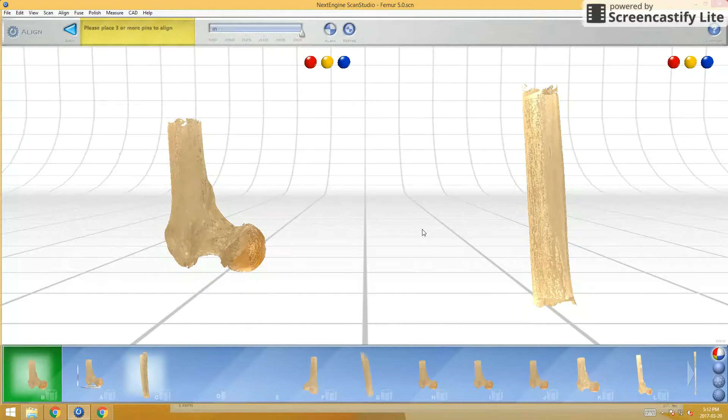So we started off by using the align feature to stitch 2 parts together. You can see on the left and right, we're starting with the first 2 parts. It prompts us to use 3 markers on the top. We try to match those markers on distinct features on the left and on the right part. That would help the software recognize where to stitch it together.

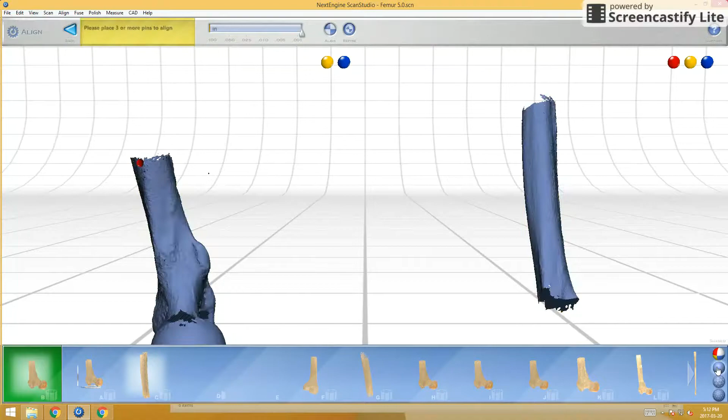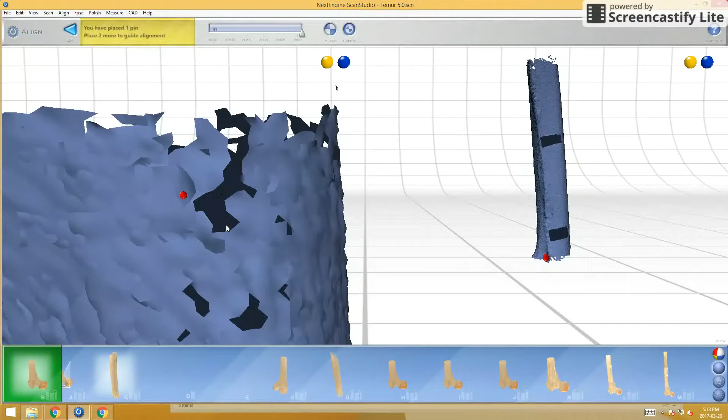So we just changed the view here, makes it a little bit clearer to see the features. You can see on the right part there are some holes, and that's where we put our electrical tape markers on the physical bone. We did that so it could help us in this process find the distinct features and how they align. So we place all 3 markers on the left and on the right part, and we click align feature on the top, and there you have it. It's all one piece.

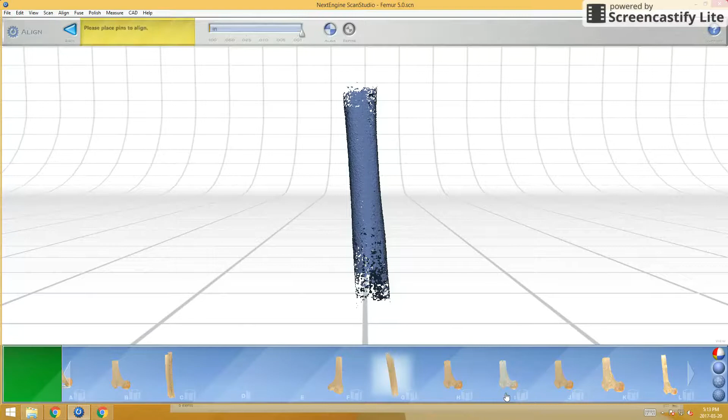So now that we have 2 pieces stitched together, we did the same for the other 2 pieces. Same process, 3 markers on each, and then hit the align feature. We'll show you the final product here. So there you have it.

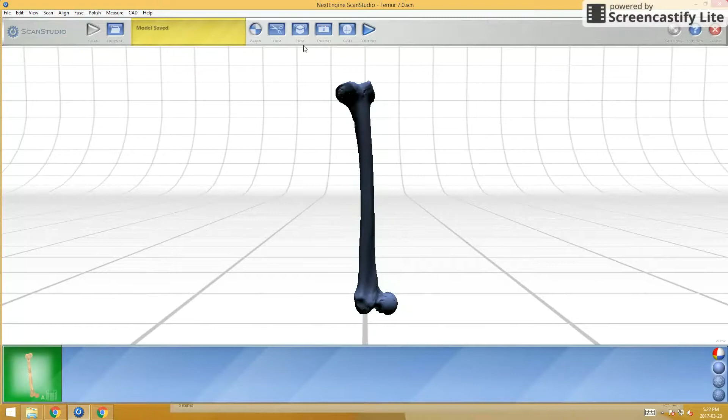So the next step is to use the fuse feature on the top to convert this body from a hollow body to a solid body. It's very straightforward. Click on fuse on the top. We go into the settings, and we have to make sure we set it to volume merge and put it at a reasonable pixel number. We set ours to 10 pixels and hit apply. And next we just run the fuse.

So the next step, we go to polish, then simplify, and hit simplify. As you could see, there's a tolerance bar on the top. We set ours to 0.2, and the higher the tolerance, the less resolution we have for our mesh.

This helps us when we export it to SolidWorks later, so it's a smaller file. You could check the size of the mesh by going to File, Model Information, and check how many triangles. Our initial one was 149,000, and we were able to bring it down to 32,000 triangles, and that will help us with the size of the export file.

And finally, we save our model as xyz.xyz. There are multiple formats for SolidWorks to recognize, but we decided to go with .xyz.

So next we go to SolidWorks, open a new parts file, and before we are able to import the .xyz file, we have to make sure we have the Scan to 3D add-on. So we go to Tools, Add-ins, and make sure we check on the Scan to 3D checked. Next we go to the toolbar, right click, and make sure we have the features highlighted.

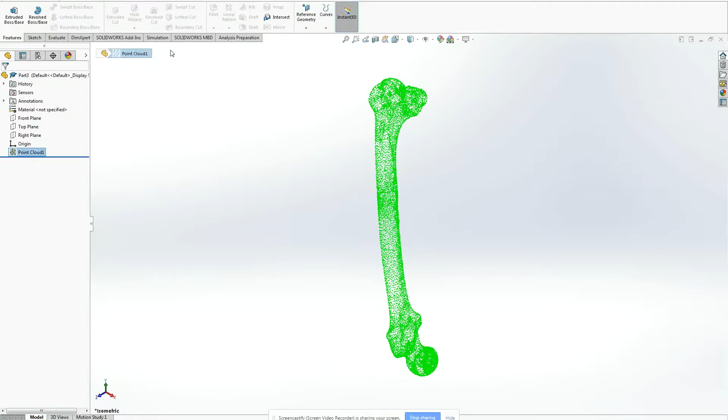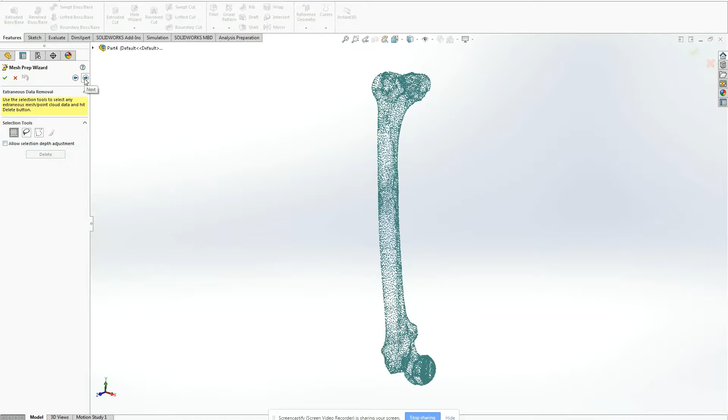So now that we have our point cloud data, we find the point cloud data on the left-hand side and run the mesh prep wizard that we could find in the features tab on the top. Unfortunately it's not showing in this video, but you'll find it in the Scan to 3D tab, and run the mesh prep wizard. It'll go through the setups, give it a name, go next, and you could run down. We just used the default for ours, and it'll automatically generate the mesh according to the points we have right now.

So now that we have our mesh, we could choose to make it more smooth by changing the bar, and we put ours to the maximum, so you can see the edges are a little bit more smooth now. We go next. It recognizes the holes that are in the body, and there's quite a bit, as you can see.

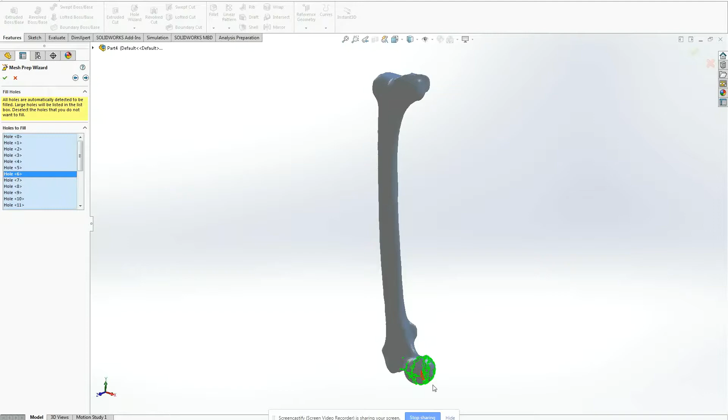So in this feature, it'll fill up the holes automatically. So we click next. And once that's filled up, there's still holes, but we could do those and fix those manually. We could also do them automatically using the launch surface wizard. So we set ours automatically, so it'll try to fix as many holes as possible automatically.

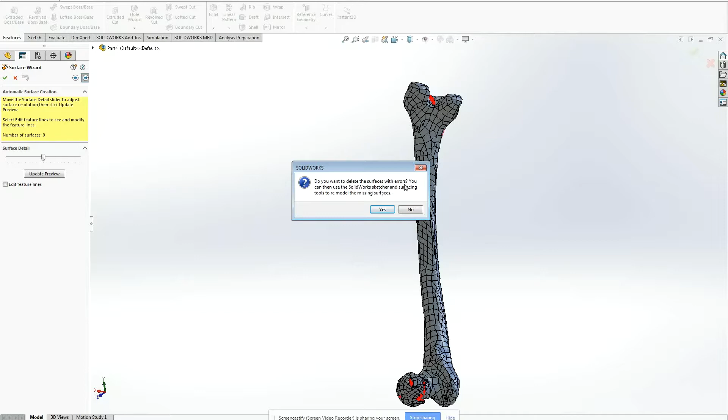We choose the default surface details, so we keep our mesh as small as possible. Over here, the error shows us that there are still holes in our model, and we decided to just go ahead and delete those and fix them manually.

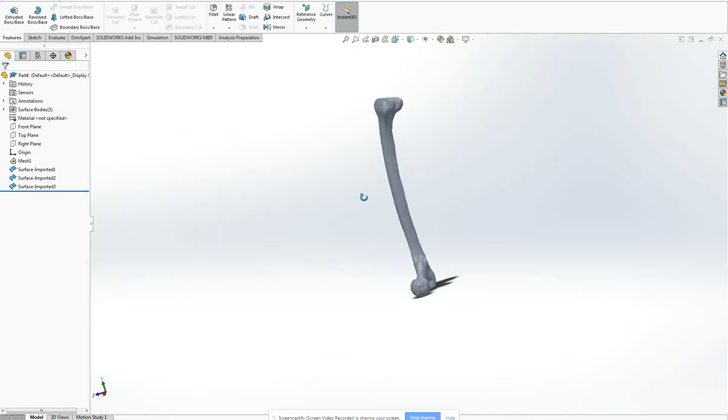So this is what we have as far as our model. As you can see, there are still holes that we decided to delete. In order to do anything with this model, we have to make sure it's a solid model, and before we can do that, we have to close all these holes.

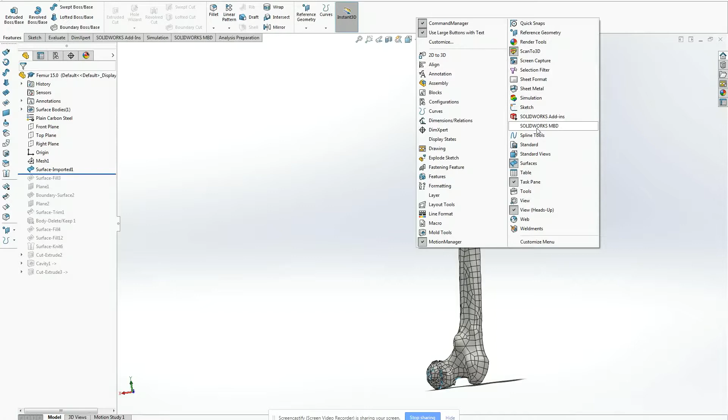We'll use the surface features to be able to fill these holes. We select it from the left-hand side, make sure we have the surface features, and this shows all the types of surface features we will use. Mostly we'll use the fill feature and the knit surface.

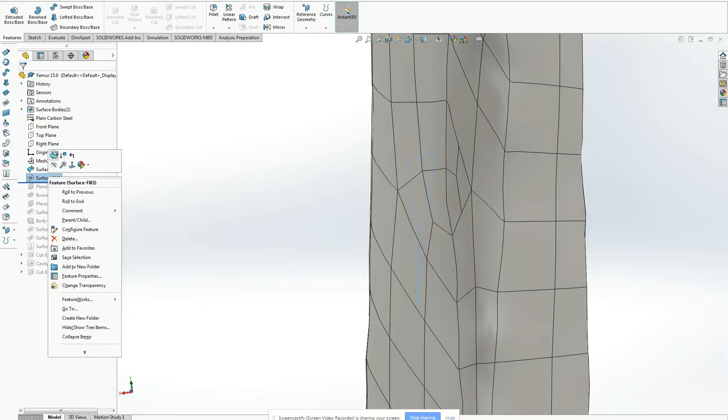Starting off with our first fill feature, we have a hole in the middle of this body. We'll show you what we've done. This is on the other side of the bone. We selected the boundaries around the hole, as you can see, and clicked surface fill, and automatically it was able to fill in that hole.

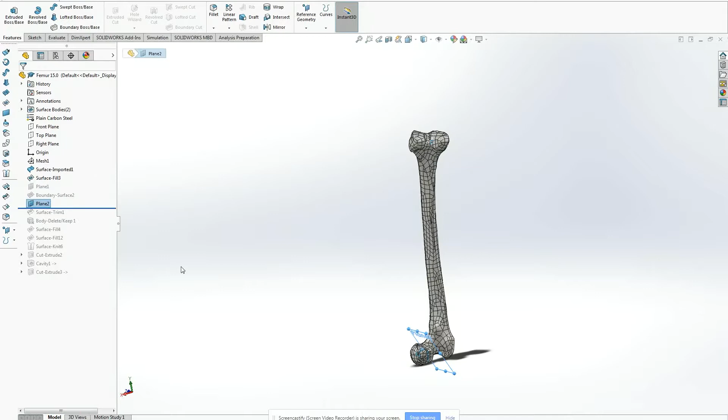The next step was to cut off the bottom of the bone, and to do that we decided to put in a plane. We could insert a plane by going to Tools, Reference Geometry, Plane. As you can see, it's on the bottom there.

The reason we cut this off is because there's quite a bit of holes, and it's going to take a lot of time to fix them, and at the same time we don't need this part because the prosthesis is going to go where this part is.

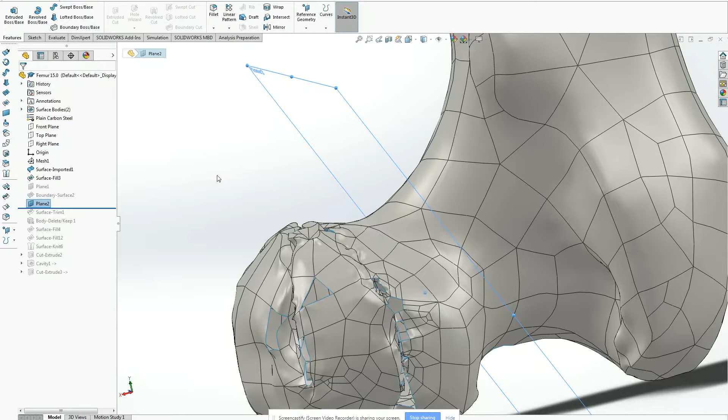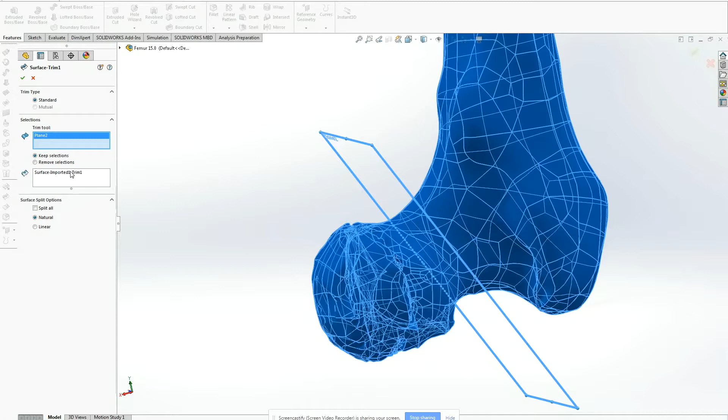So we decided to put in a reference plane, and next use the surface trim feature to trim that whole section out. If we go into the surface trim, it just allows you to choose the bodies that you want to cut. We give it a reference body, which is our full model, and the section we want to cut off, which is on the left-hand side of the plane. Then we just click OK.

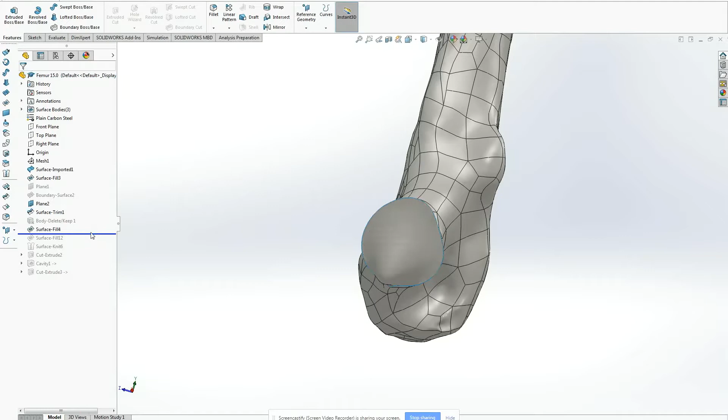And there we go. We still have a hollow body, but at least all the holes in that section we don't have to worry about for now. So next we want to fill out that hole by using the surface fill feature.

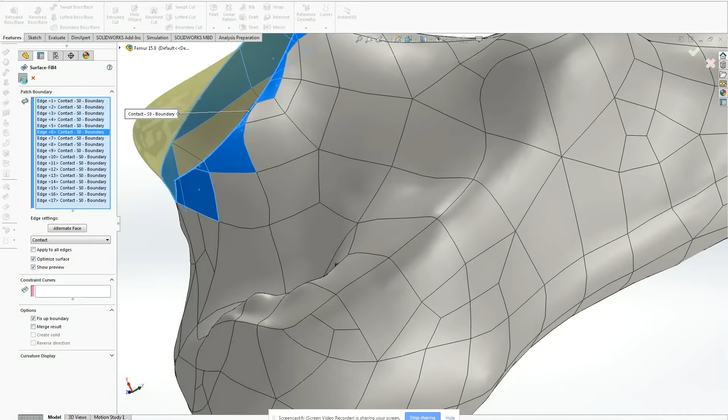Same as before, we select the boundaries around the holes, on the surfaces around the hole, one by one, as you can see. Click OK, and it automatically fills it out. We're not worried about the shape of it, we'll modify that later. We'll just focus on filling the rest of the holes.

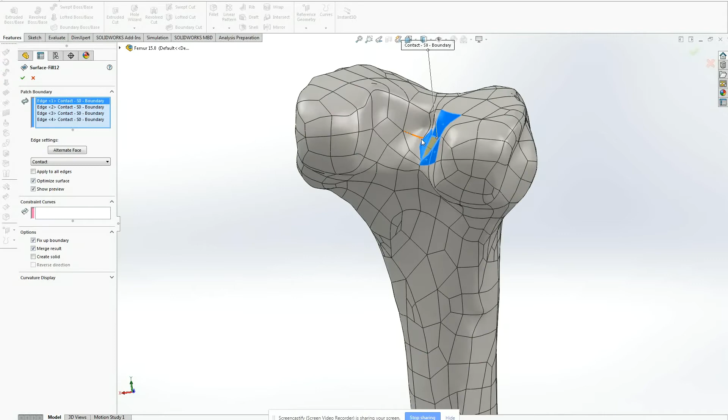Next we have a hole on the top of the model. We use the surface fill again, same process: select the boundaries of the surfaces around the holes. Click OK. So the next step is to use the knit feature, which stitches our body and makes sure it's watertight.

In order to do that, we have to make sure there are no hidden holes, and there's a great feature we could use to do that. We go to Tools, Evaluate, and Check.

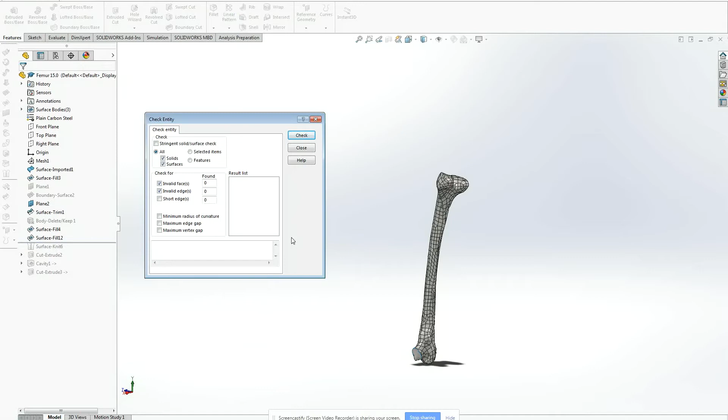This check feature shows you all the hidden holes just by clicking check, and in our case we had three hidden holes. It's great, it shows you exactly where the holes are, so you could go back and use the surface fill feature to fix them. Once we make sure there are no hidden holes, we could proceed and do the knit feature without any errors.

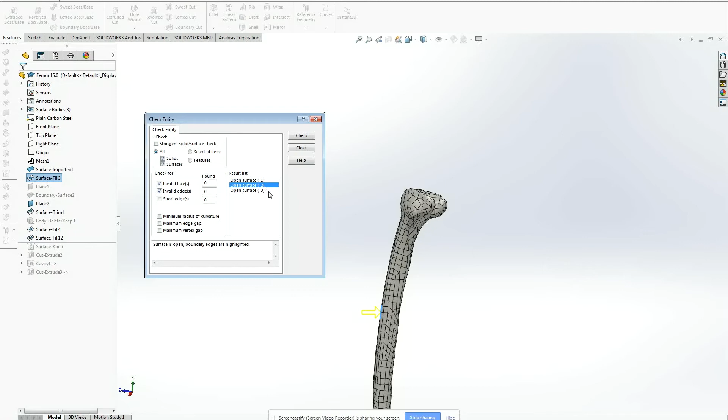So next, now we could use the surface knit feature. It's pretty straightforward, we just select our entire body, as you can see, and we have to make sure we select the create solid option that's on the bottom there.

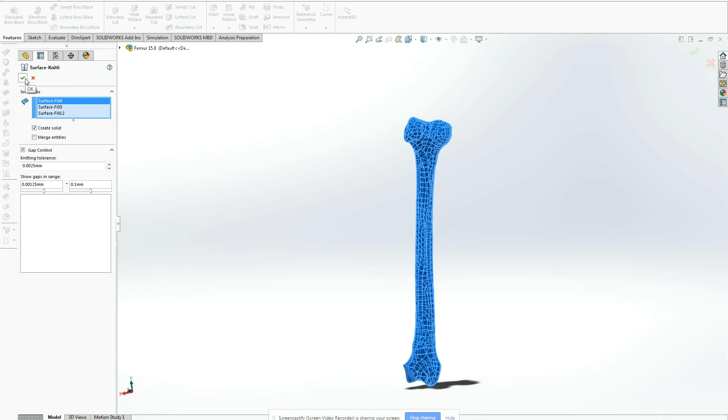And if that's grayed out, it means there's a hidden hole and you have to go back and use the check feature to find those holes and fix them. But in this case, everything checks out. We were able to click OK, and now it's watertight and a solid body, and we could go ahead and modify it further.